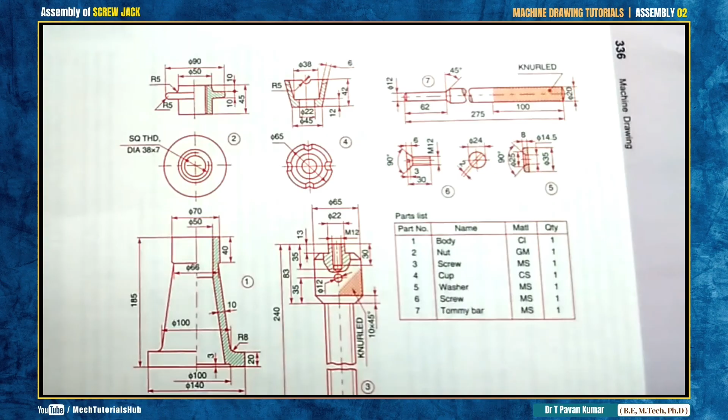In the same way, I'll try to simplify and draw in a faster way. Today we discuss the screw jack. Jack itself indicates that it is used to lift a body, for example, the jack that we use in a car. If something goes wrong, we lift the car with the help of a jack. The jack contains many components, from 1 to 7. In the table, the name of the part, material and quantity are given.

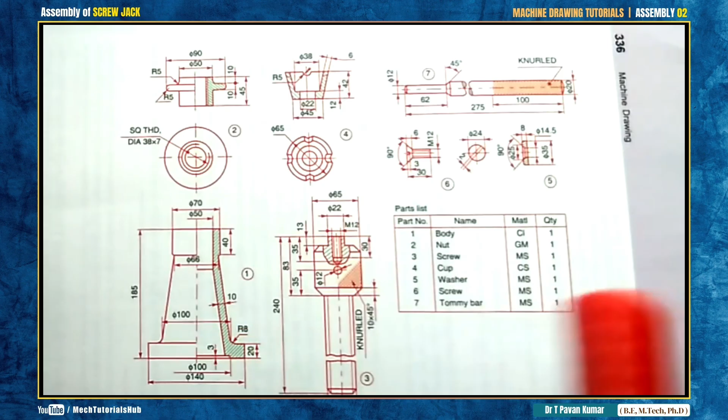All the parts are placed here with all the standard specifications. We have to assemble them all to get the proper component in its working position. For example, have a look at part number 1. As I said, drawing part number 1 initially is more important, then come the smaller parts assembled with part number 1, which maintains the major dimensions 185, 100, 140, 70 and 50.

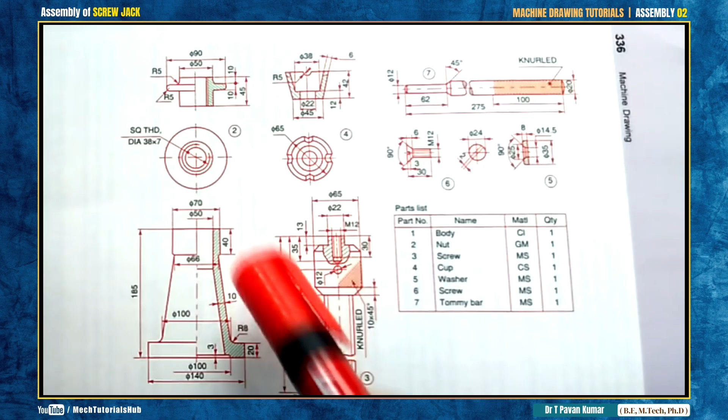Similarly, have a look at part number 2, where all the dimensions are given and the top view is also given. For part number 1, no top view is given. When the top view is not given, it indicates that the information required to draw the sketch is already given in the front view, so there is no need of giving a top view in the question.

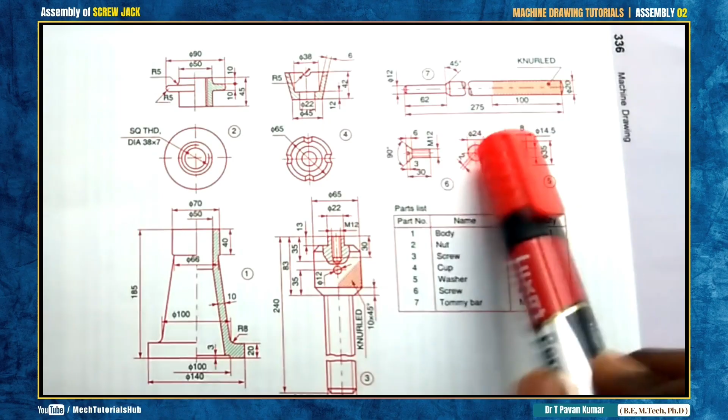Similarly, have a look at part number 4. In the front view, most dimensions are given; the few missing dimensions are given in the top view. Similarly, for part number 7 no side view is given, as it is not required because most of the required dimensions are given in the front view itself. Similarly for these two parts: there is a washer and there is a screw. We need to assemble them all.

Have a look at part number 3, where you have threading. Here the double line indicates threading from here to this point, and 240 minus these dimensions gives you this length. Here it maintains a diameter of 38 by 7. The same dimension is maintained by some other component that we need to find. That is more important.

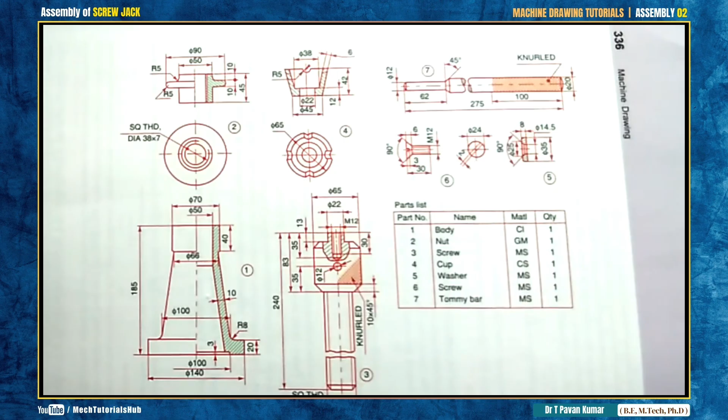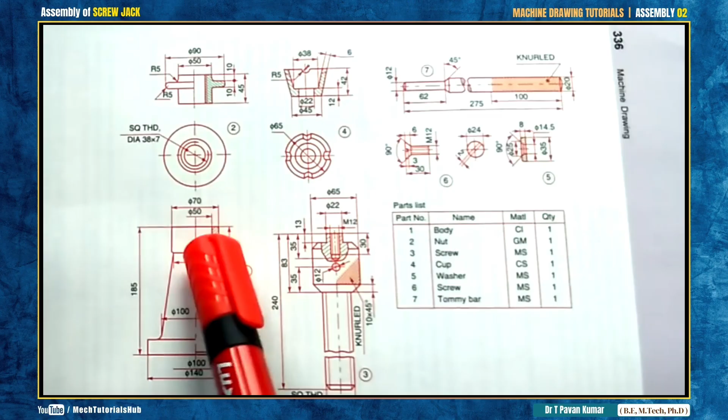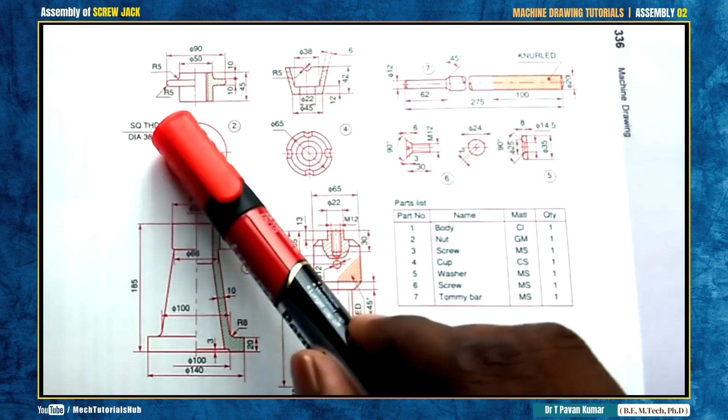So this will sit inside part number 1. Then what is the minimum diameter of part number 2 once it is inserted? It is 38 by 7, which you can see in the top view of part number 2. Now this 38 by 7 matches with this 38 by 7, which indicates that there is a hole in part number 2, which is already inserted in part number 1.

So in part number 2 I can insert part number 3 up to this length, which can be calculated as 240 minus these dimensions. It will go and sit inside completely. So this bottom horizontal will come and match with the top horizontal of part number 2. Try to understand: this bottom horizontal will match with the top horizontal of part number 2.

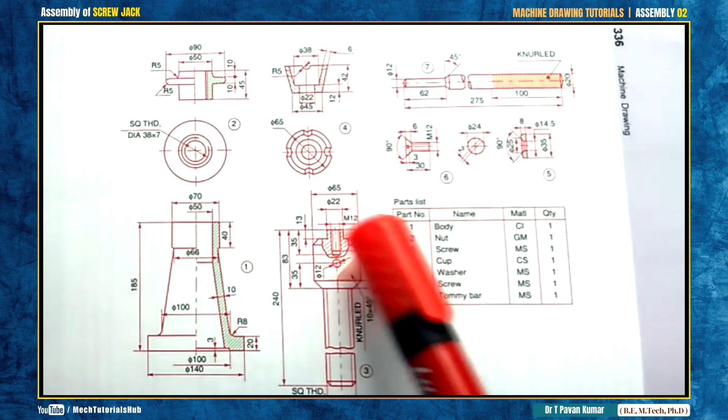Okay, then on the top of part number 3, part number 4 will come and sit because the dimensions here are diameter 22 matching with diameter 22. Here diameter 22 is a shaft, here diameter 22 is a hole. So obviously it will come and sit on the top.

So what is the width maintaining? It is maintaining a width of 12 mm. Here it is maintaining a width of 13 mm. So there is 1 mm left above the part number 4 where on that 1 mm you can place this washer, then again a screw to fit these two components.

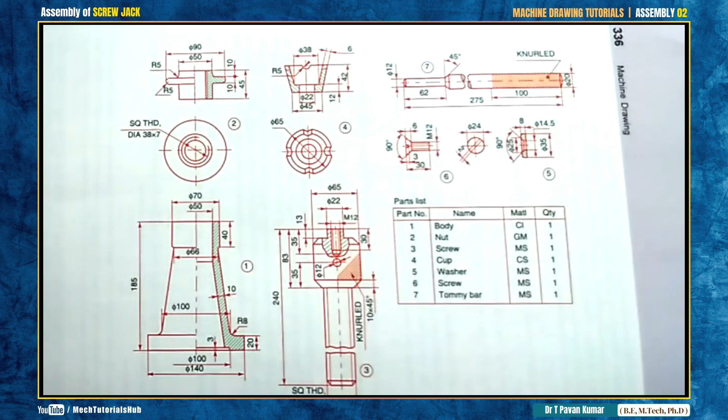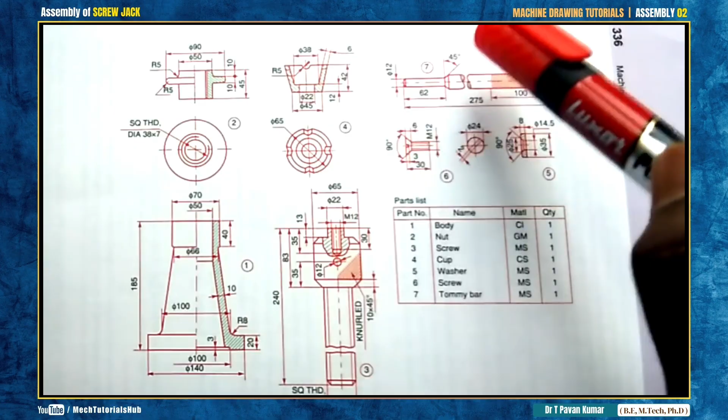Okay, and to fasten and unfasten, to make the component move up and down, we use a Tommy bar, which is part number 7, which is having 275 length. Okay, 100 knurling point. Knurling is nothing but to hold the component. Again, this 62 is the length going to insert in the part. Okay, 12 is the dimension, which is again a diameter of 12 by 62, which is going to sit in this particular part number 3.

Okay, now the assembly, I'll make it so simple. I'll try to simplify this particular drawing. Now we see the assembly of a screw jack. Okay, now as I said initially, we'll try to draw the part number 1 of screw jack. I'll start from the base, I'll go till the top. Okay, now I'll take one horizontal. I'll try to draw the base first.

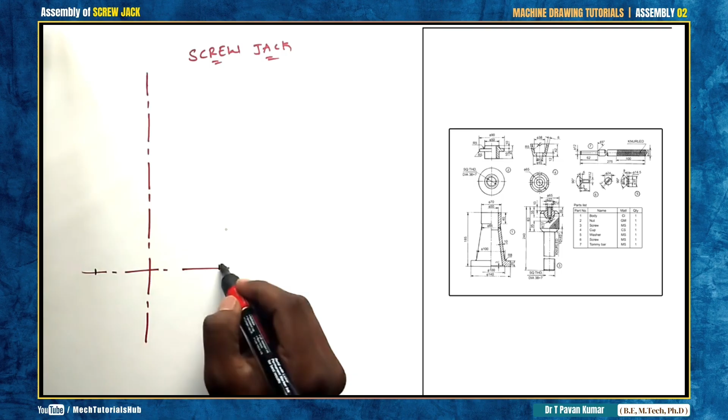Now out and out dimensions are 140. Now have a look at the question. Part number 1 bottom dimensions are 140 and 100. So 140 by 2, I'll make it into 2 halves. Okay, which is maintaining a thickness of 20. From here 20, I'll make a mark 20.

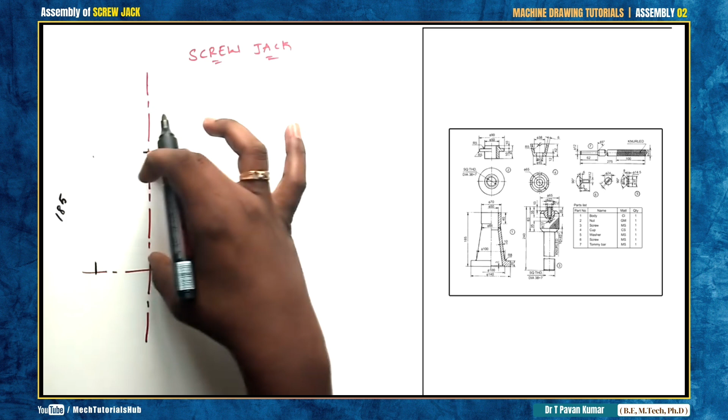Okay, then again from here I'll try to measure a distance of 185 from here to this point somewhere here. So where my component is going to end up, I'll make a mark in the center 185. From here to this point it is going to be 185, this distance 185. So part number 1 is going to sit in between these two lines. Wherever I got this 185, I'll try to divide this into 2 segments.

70, outer dimension 70, so 35 on both sides. I'll try to close the line, draw a line, and there is a depth of 40. Okay, there is internal diameter of 66. Internal diameter of 66 given in the question, and here again a diameter of 100 given. Already it is maintaining 140, so here it is 100.

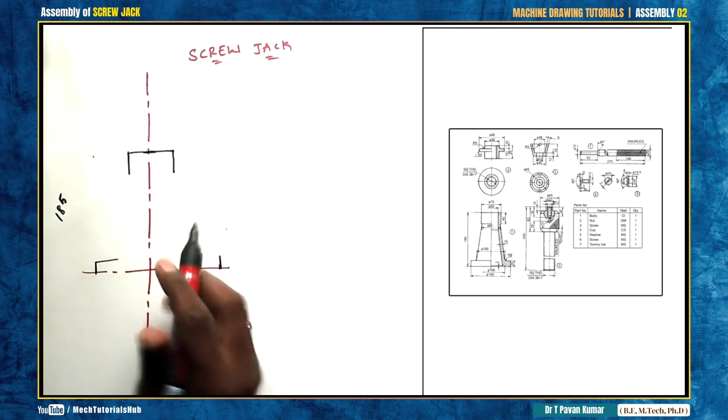So what I try to do is, based on this line 20 height, I'll try to draw a length of, for example, 100. So from the center 50, I'll close the line. Okay, fine. So from the center to this point it is going to be 50. From the center to this point it is going to be 50. So overall it is going to be 100. Outer it is going to be 140.

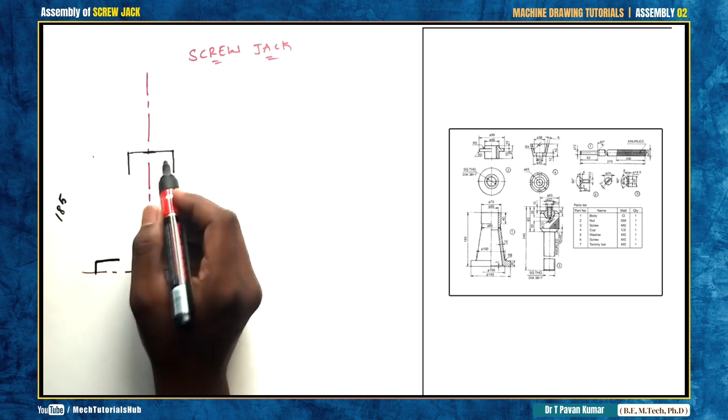Here I'll try to measure a distance of 66, which is again given in the question. So from here 66, already it is maintaining 70, out and out 70 minus 66 is 4 mm. So from here I'll make a mark of 2 on both sides. Then I'll try to join this point to the 100 mm diameter from here to this point with the help of a drafter scale. Similarly this one. The shape is going to be something like this.

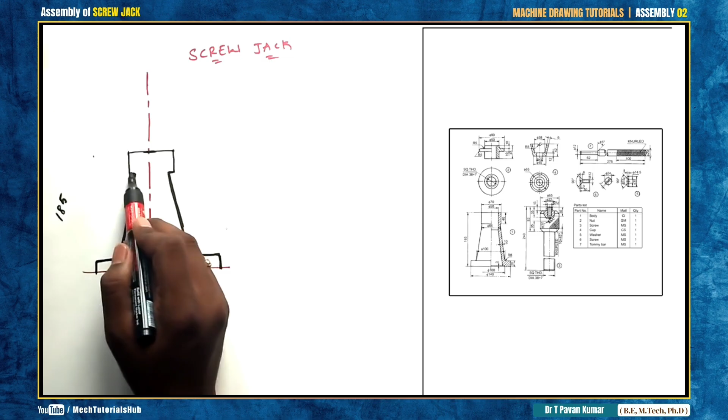Okay, now you can join this line also. If it is not a sectional view, you can join this line also. If it is a sectional view, don't join the complete line. If it is a half sectional view, only draw till this point. If there is no sectioning, you can continue the line, not a problem.

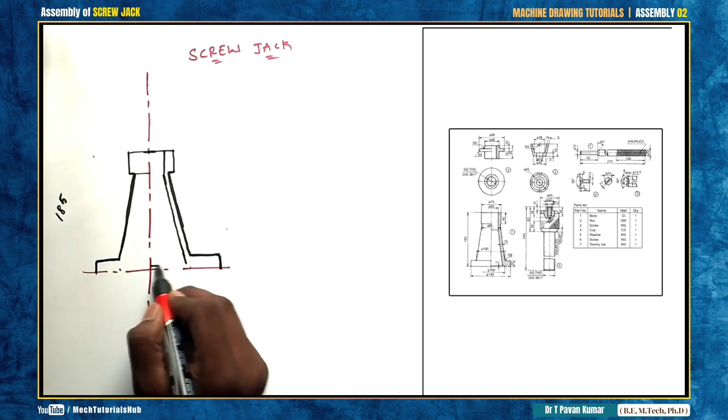Internally there is a hole of diameter 50, which is given in the question again. 50 means from here 25 mm. Now draw the 25 down. Then again from here wherever you got a slant edge, draw the line till it meets 100 mm. So make a mark of 100 on the bottom horizontal and draw this line. Means there is a groove, 100 dia groove, in the bottom face of part number 1.

Okay, now this is maintaining a width of 20. Now this width is given as 3 mm width, and here this diameter is given as 140, and this diameter is given as 100.

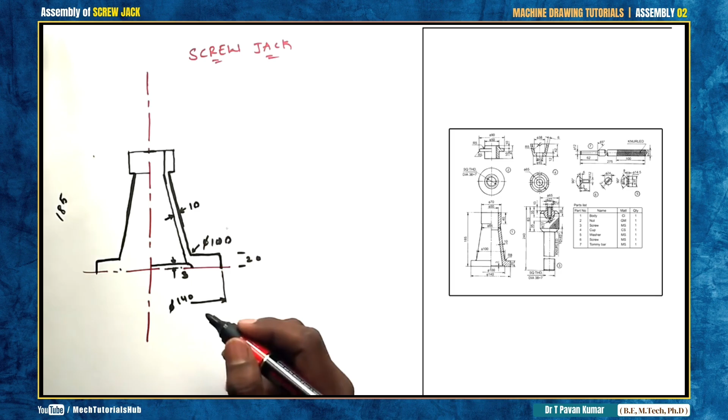This diameter is 140, and there is a width of 10 mm to be maintained. Okay, this is about part number 1, where I can place one more part over. Now as I said in the beginning, take part number 2, which is maintaining an internal diameter of 50 dia. So part number 2 comes and sits on part number 1.

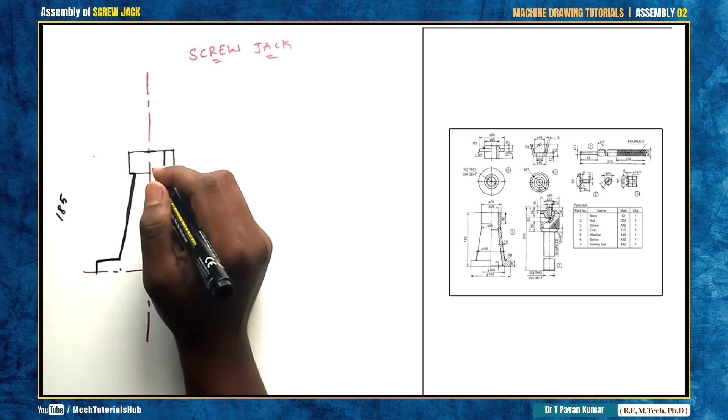So the bottom depth of 45 minus 10, 45 minus 20, so it is going to be 25. So 25 is going to insert, already it is maintaining a depth of 40, so it is going to be something 25, maybe up to here. Okay, make it hidden because it got inserted. Then again there is a leading edge of 90, from the center 45, already it is maintaining 70, so 45 means it will obviously come out, this will also come out.

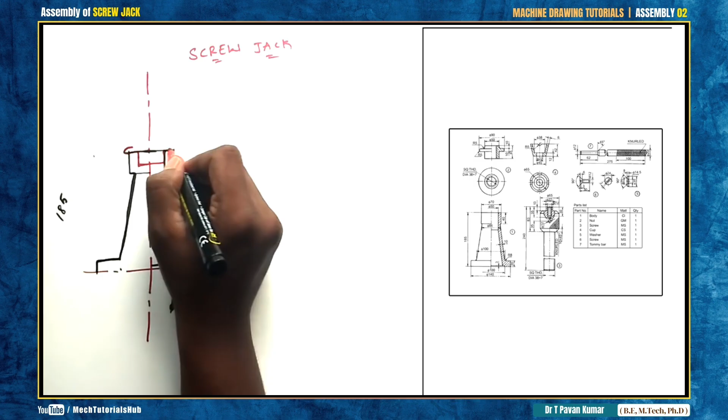Okay, then again there is a height of 10 mm, diameter of 50, this is matching with this. So join till this point with your scale. Then again a gap of 10 mm, draw one horizontal followed by an inclination line joining both.

Okay, clear? Then again, there is one more hole, a minimum hole of diameter 38 by 7. When I explained initially, there is a diameter of 38 by 7 minimum from top to bottom, so that is maintained here. So that you need to show with a hidden line. Okay, one side or two sides, not a problem.

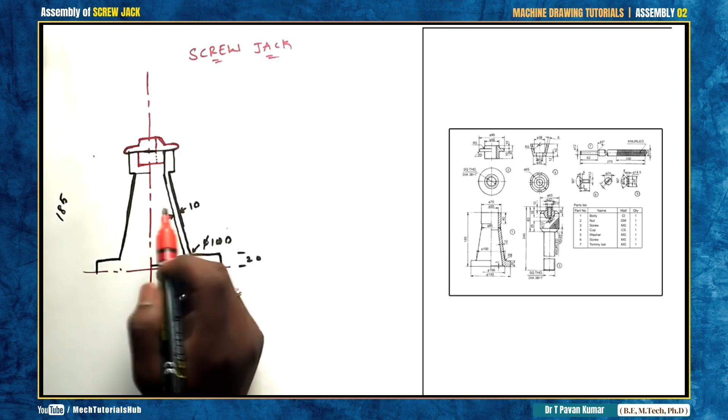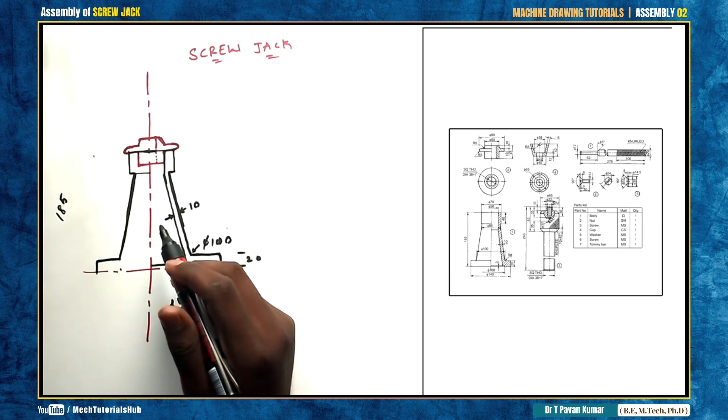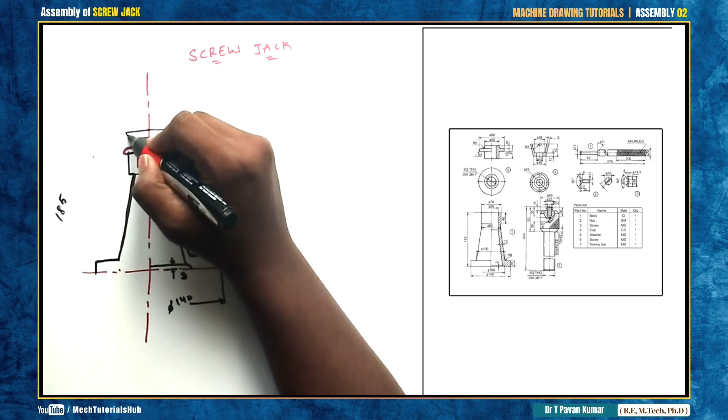So from the center measure 65 by 2. Okay, 32.5 on both sides. From here, maybe this point, I'll draw the horizontal. Okay, so maintaining a gap of 10 mm, draw one more horizontal. From here, align your drafter to 45 degrees, draw a 45 degrees line until it goes and meets with the horizontal above. 45 degrees line, something like this.

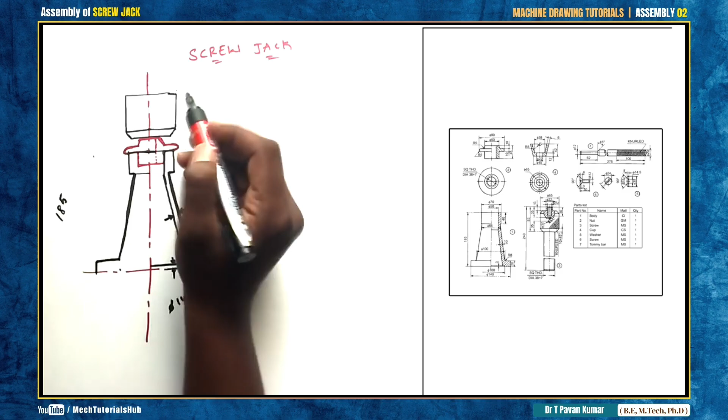Okay, now this part number 3 box is maintaining a height of almost 83 minus 13 mm. You need to subtract the top shaft. Okay, 83 minus 13, 70. So from here, draw that 70 mm. Close the box. Okay, again 45 degrees line up to 10 mm width. Again 45 degrees line up to 10 mm. Okay, the part is going to be something like this.

The rest of the part will insert into part number 1. So when it inserts, it becomes invisible. So make it invisible with a dashed line, something like this. Okay, now you need to draw a double line because it is having threads on the shaft. Okay, then something like this.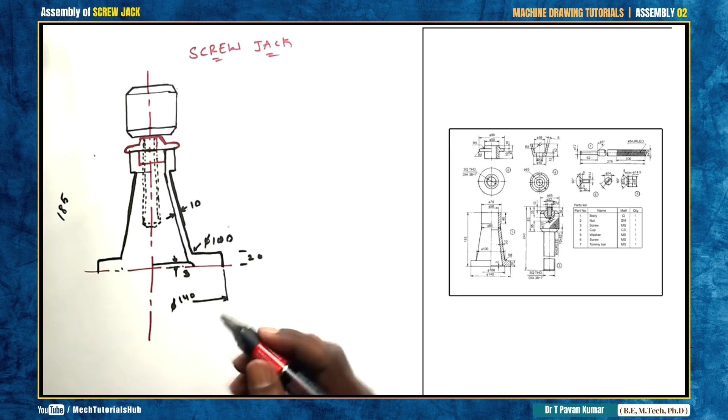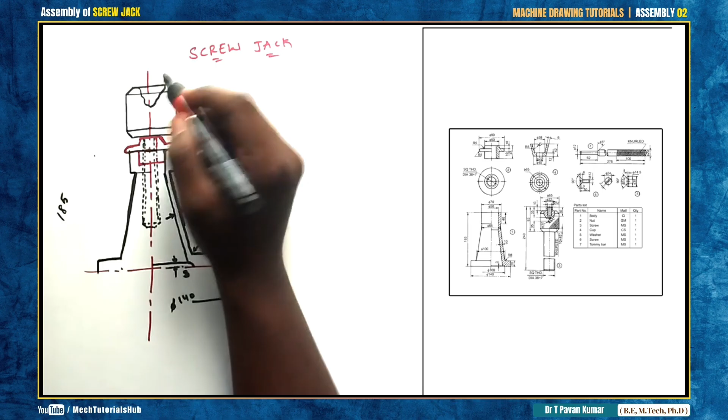Whatever the arrangement given in the question, accordingly try to maintain that length, maintain that shape, and make the lines dashed lines because it is inserted completely inside. Okay, if it is a half sectional view, darken these lines and let the hidden lines be hidden only. On the top of this there is a section given, meaning some material got removed to show the internal intricate shape.

Okay, then there is a shaft over which is of dimensions 13 by 12. Maintaining a height of 13 and diameter of 12, means 6. So close this. Okay, which is again having some internal hole. The shaft is having an internal hole. So here you could see the internal hole. Manually you can make it with the help of a small scale.

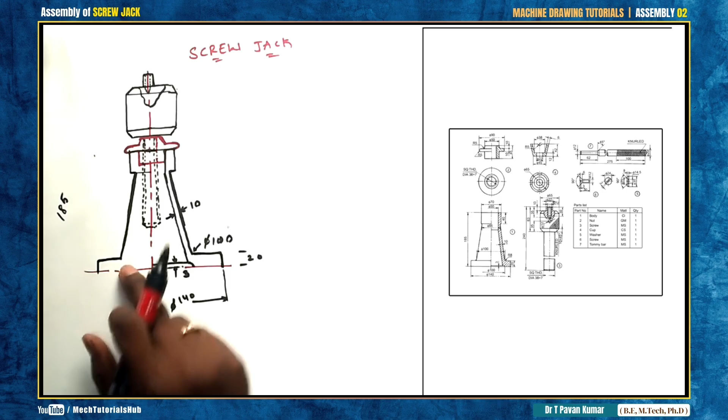Fine, this is the arrangement. Part number 1, part number 2, part number 3. Most of the things are set. Now what about part number 4? Take part number 4, this 13 mm matching with part number 4, 12 mm. So there will be a clearance here.

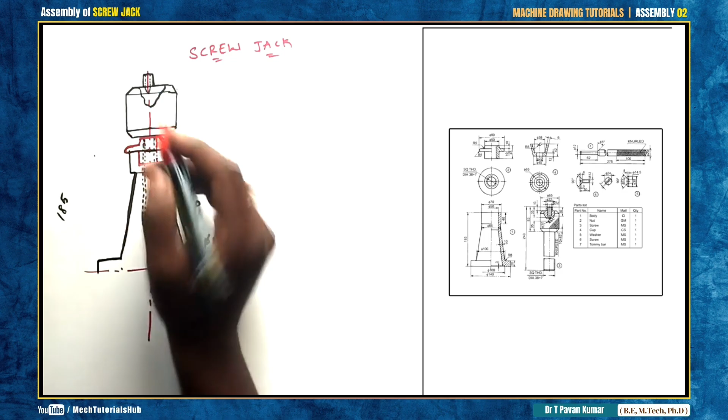I'll take part number 4, which is maintaining a bottom width of 45, a hole of 22 dia and an overall height of 42. Okay, from here it is maintaining a height of 42. And the outer diameter, we don't know, it is not given.

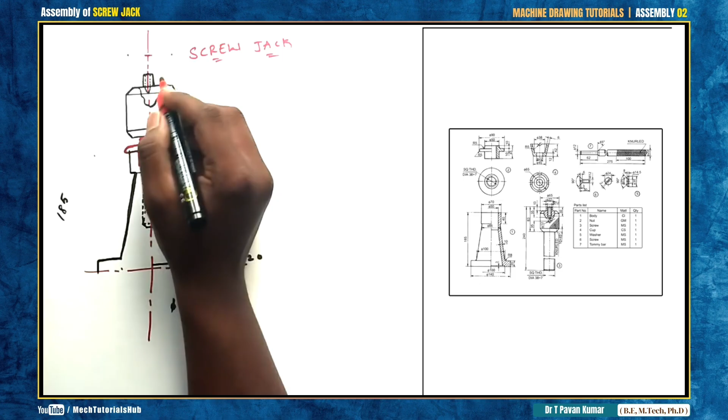You can have a look at part number 4 top view. It is given as 65 from the center. Overall the diameter is going to be 65; 65 by 2 will give you the complete dimensions, 32.5. From here make a mark of 32.5 on both sides. Then again at the bottom, it is going to be 45 out and out, 45 means 22.5, somewhere here and here. This is 45, from here to here it is going to be 65.

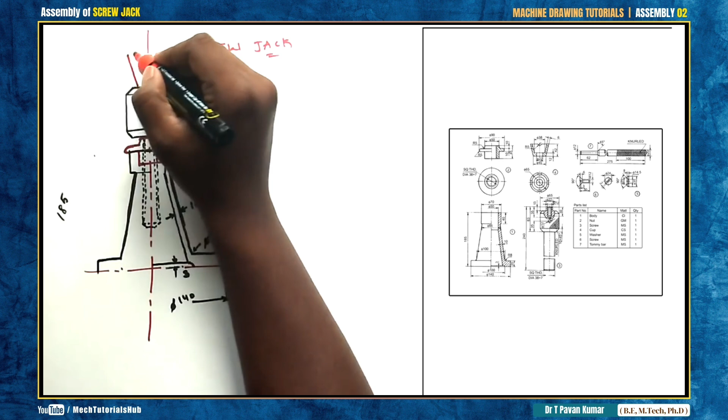The dimension 65 can be seen in the top view of part number 4, 45 can be seen in the front view of part number 4. Join these two lines, 1, 2. Then it is maintaining a thickness of how much? It is given in the question, 6 mm. From here make a mark of 6, draw one more line, 6, one more line. Join the line like this. Now continue the line, there will be a curve, close it. It is a hollow section, completely open inside, so it is maintaining a thickness, which is a circular object.

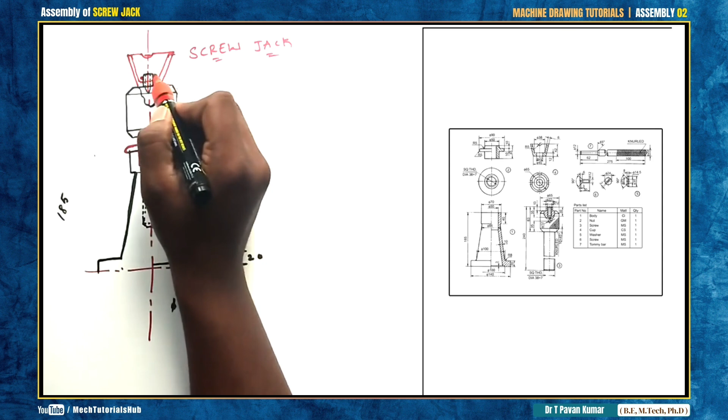From the top, you can place the washer, which is part number 5. Just indicate a double line, that's enough. From the top try to place the screw, which is part number 6. Once the screw is placed, it will look something like this. Simply draw the inclination, close it. This indicates that there is a screw. The complete arrangement is fixed something like this. Now here it is maintaining a thickness of 6 mm.

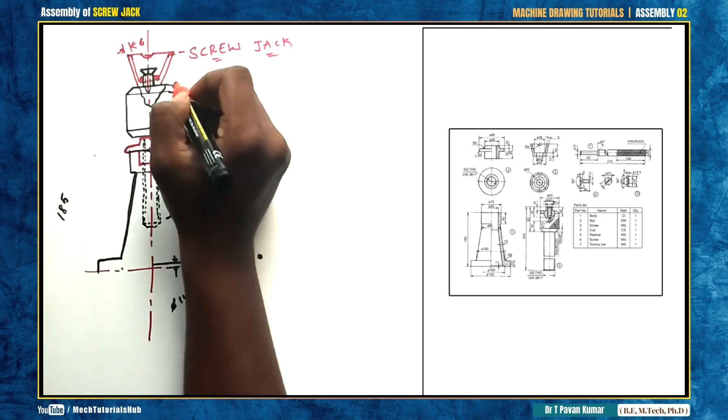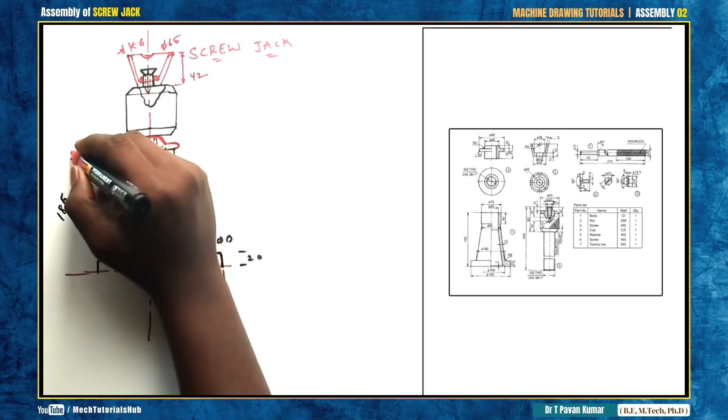And there is a height. What is the height maintained by part number 4? Overall height is going to be 42. Then this out and out diameter is going to be 65. And this height from this point till this point is going to be 185. This outer diameter is going to be how much? Given 70. Roughly I'm placing all the dimensions, but you have to give an arrowhead. And there is a depth of 40 mm. There is a thickness of 20 mm. Diameter is already given. And never place the dimension internally, try to place it outside mostly.

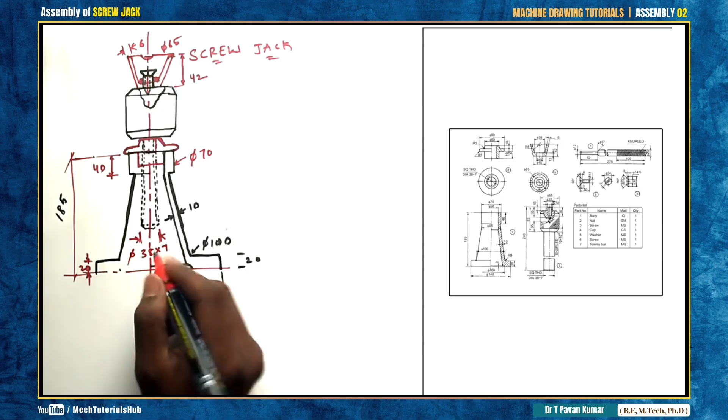And here there is a dimension of how much? Diameter 38 by 7, which is matching with both. And here there is a dimension of 83 from top to bottom, from here to here it is going to be 83. And here this height is 13 mm, diameter of 12 mm. Now this is maintaining 10 by 45 degrees. 1, 2, 3, 4, all are maintaining 10 by 45 degrees. There is a knurling. How to place the knurling I'll show you.

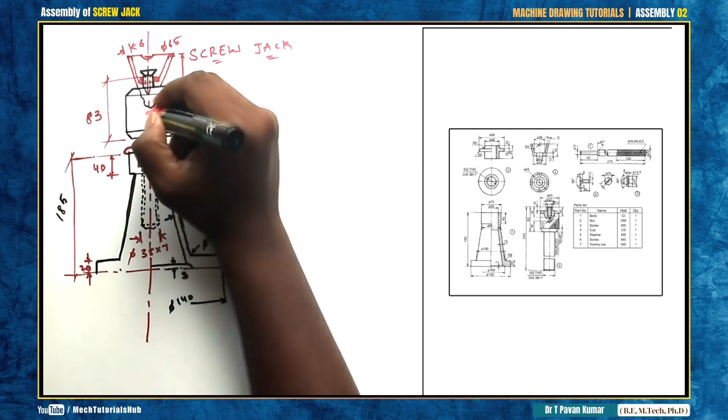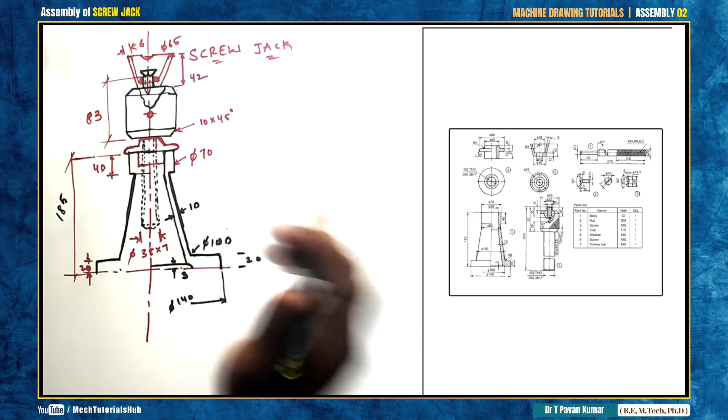And there is a hole somewhere here, a hole of diameter 12 mm, where the Tommy bar will sit, which is part number 7. The component is rotated, so the Tommy bar can be shown from this side also. So I'll remove this hole, turn the component, and place the Tommy bar. It has a diameter of 12, maintaining a length of 62. From here I'll maintain that 62. After that 62, it is going to be inclined. Then there is a diameter of 20 maintained.

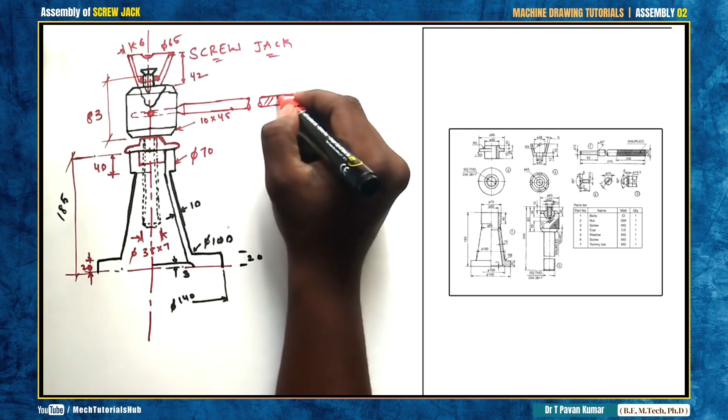Then show the cut section, because we can't draw the complete length of 275. That is the reason we are showing a cut section. This length could be any convenient length according to your drawing sheet, but you have to show the number as 275 only. Close it. For holding purpose, place the diamond knurling that we learned in our first topic, because we hold it and turn it, so it will go up and down accordingly. Same thing here also, knurling is given on this part also. This is how we'll show the assembly.

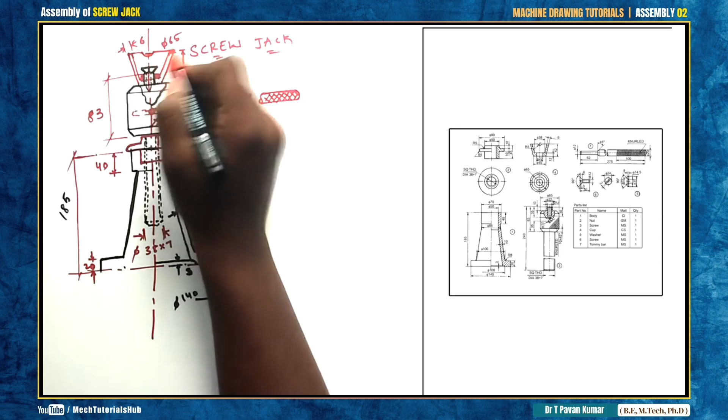When I view from the top, I could see a diameter of 65, 70, then again this dimension, then again the overall dimension of 140. So to draw the top view, I can take a distance away, draw a horizontal, then I'll try to draw the component.

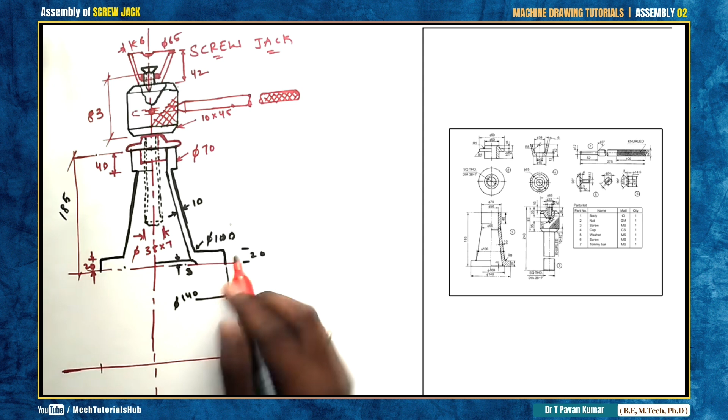Now here, drawing 140 is not sufficient; space is not sufficient. What I try to do is make a mark of 140 from here to here, this point also. Then I'll simply draw a semicircle. This is also okay. In your external or internal, if the space is not available, you can manage with a semicircle.

Then along with the semicircle, I could see a diameter of 65 and many others. Okay, there is a screw. Then again there is what? Tommy bar. So that has to match with this Tommy bar length. Then again knurling has to be shown. Again the cut section has to be shown. Simply draw these dimensions and show the dimension, the diameter of 140.

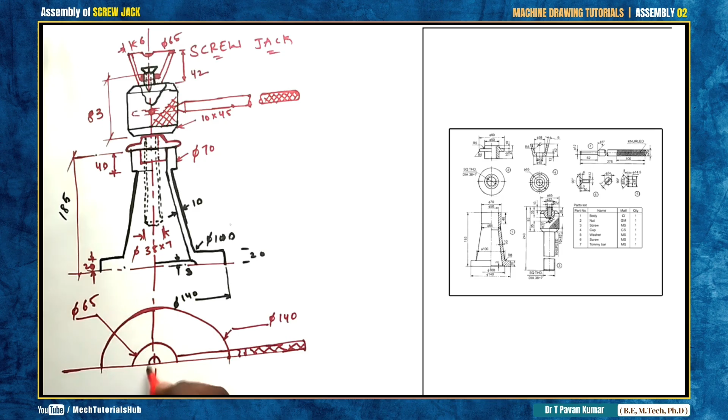Here there is a diameter of how much? 65. Again there is a minimum diameter of your screw, which is 24. This is 24. So this is how we'll draw an assembly of a screw jack. And also try to place the numbers. This is part number 1, this is part number 2, this is part number 7, this is what?

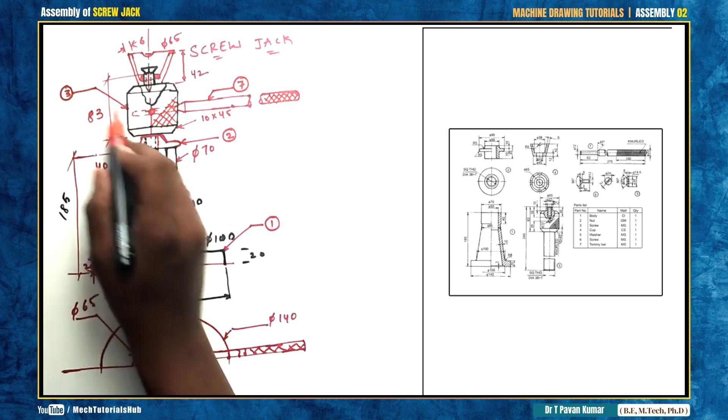Part number. Draw the circle with the help of a compass or a stencil. Again draw the circle with any other compass, and you can draw the leader line with the help of a drafter. It will maintain some angle, and this has to be drawn horizontally. Similarly, is there anything missing? Now here, this point, this is again part number 4. If you could align all the circles, it will look even better.

Try to draw all the dimensions properly. Show the dimensions with the dimension line only. The dimension line has to be something like this. Draw a line, drag above and below to get the arrow. Place your diameter or dimension, whatever. This is very much important.

Below, in the bottom right corner, try to place the box given in your question with serial number, name of the component, material, quantity. Draw the table, similar to the table given in the question. Then again units, saying that all the dimensions are in millimeters. If you reduce the scale, write the scale also. Scale is equal to 1:2 or 1:1.

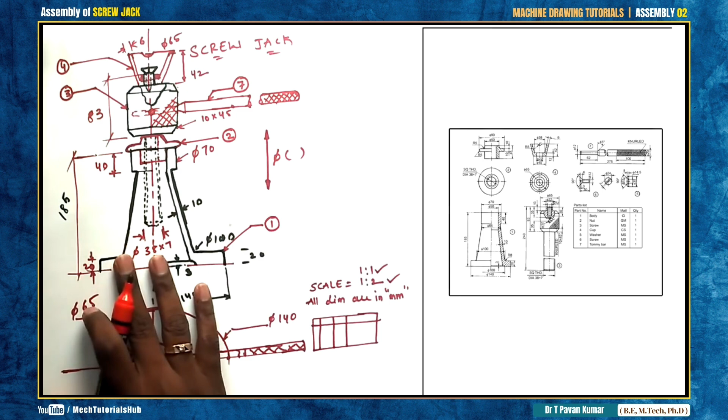If it is 1:1, whatever dimensions are given in the question, accordingly I have drawn. That indicates 1:1. If you have taken the same dimensions, no need to represent it. If you reduce the dimensions, then only you need to represent it. Here I have not taken any reduced dimensions. If sufficient space is not available for you, what you could do is directly change it to 1:2. Even if you change to 1:2, original dimensions have to be placed in the drawing. You are not supposed to place the dimensions after division.

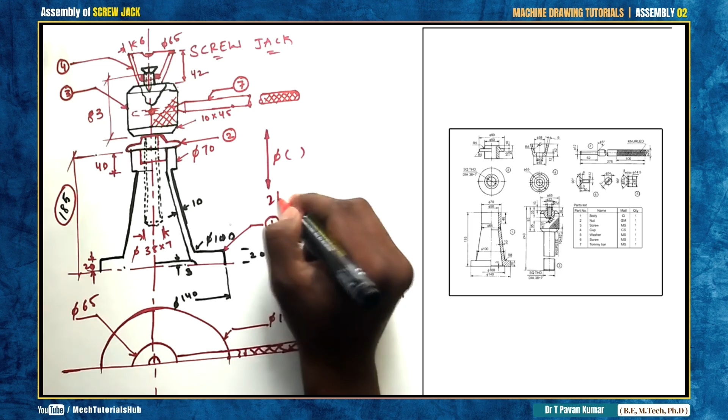This is about a screw jack, where you need to draw with utmost neatness. Use a 2H pencil initially to draw the complete sketch. 2H. Then once it is done completely, whatever needs to be darkened has to be darkened with an HB pencil. This is very much important.

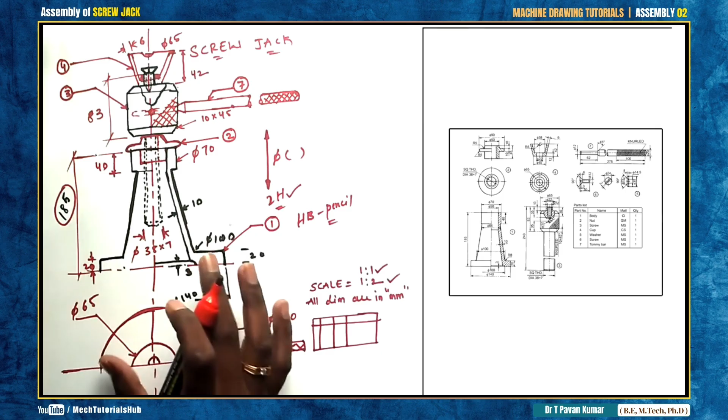One more point I would like to add is, the question may be something like this: draw the front view, top view of a screw jack. If the question is like that, you have to draw this way, or else draw the sectional view. Half sectional view of a screw jack means half section has to be hatched completely. One side has to be hatched, whether it is right or left. It means one half is going to be removed.

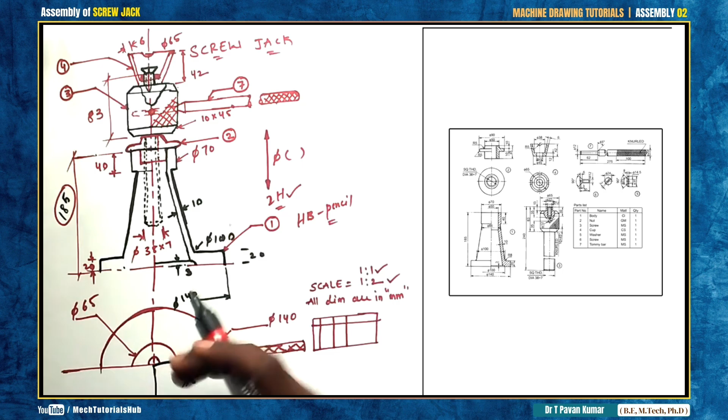For example, have a look at the top view. If it is a half sectional view, I'll remove this portion out of the complete circle. I'll remove this quarter. When you view from the front, what happens? The half is going to be hatched. Whichever got sectioned needs to get hatched, something like this. The other things will remain the same.

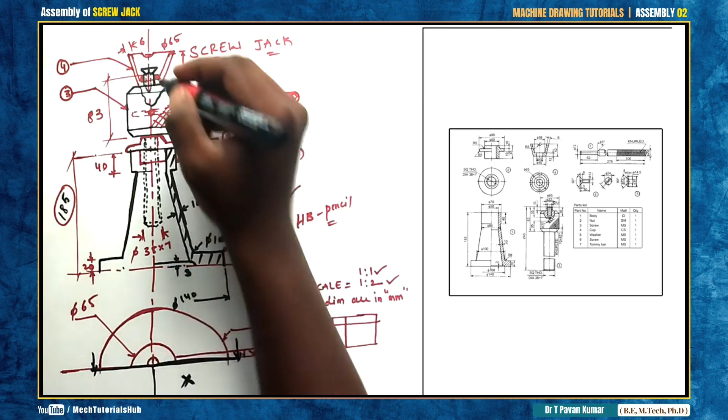If the complete thing is sectioned from one side to the other, for example sectioned something like this, then what happens? On the other side also you need to hatch the complete thing from top to bottom. Here I am drawing only the half sectional view. Try to make a note, sectional view indication. If you draw this much, this is enough, which will carry 45 marks in your external.